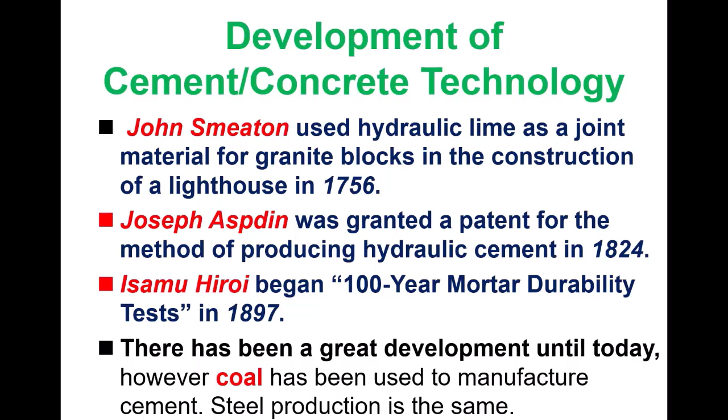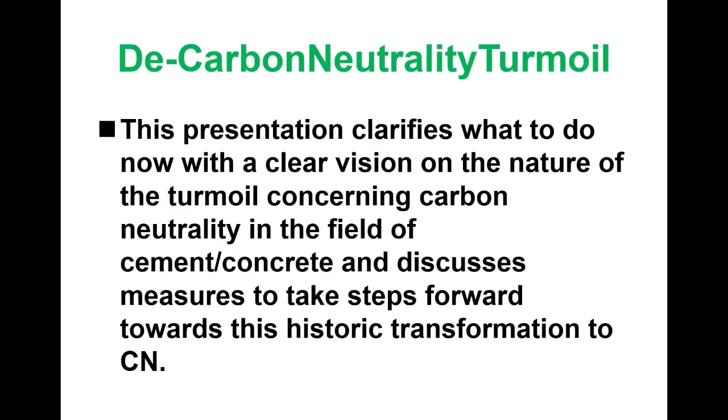So what is the decarbon neutrality turmoil? I would like to clarify what to do now with a clear vision on the nature of neutrality in the field of cement and concrete, and then discuss measures to take steps forward toward this historic transformation. I would say historic transformation to carbon neutral. So this is not so easy.

But we need to know what concrete is to understand the essence of concrete. Concrete is a quite simple material that combines aggregate, which accounts for about 70% of its volume. This is very important. Not so much we can do because of that. And with the cement hydrates, just aggregate, cement hydrate and water. Aggregate is the most abundant material on the earth. And water is the same, which is necessary for hydration of cement.

And we are using limestone as a raw material of the cement. It's a substance that has been produced by living organisms over a long time. Therefore, we can say that concrete has the characteristics of a material that we can use in large quantity. This is the nature of concrete. So when we consider carbon dioxide and carbon neutral, we need to pay attention to the essence of concrete.

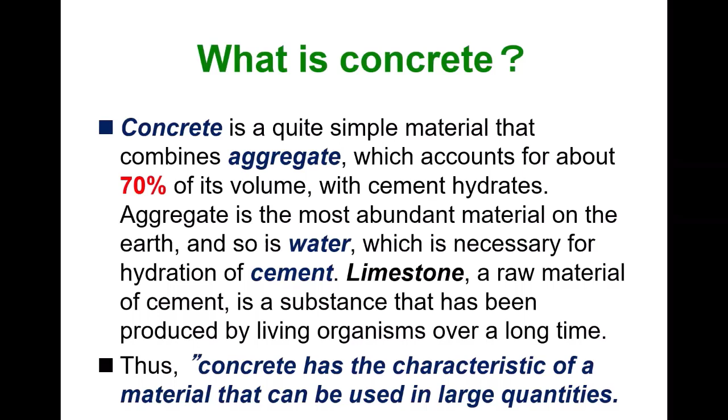And then we have discussed global warming and carbon neutrality. I would say that modern society has been created by use of fossil fuels. It is causing global warming, as you know. So because of that, we human beings have decided not to use fossil fuels, to realize carbon neutrality in the future. In the future, this is very important, because right now there is a limitation to what we can do. And let me talk about sustainability, which is related to carbon neutral.

So the United Nations defined sustainable development. It says that it meets the needs of the present without compromising the ability of future generations to meet their own needs. You can see that book, Our Common Future. It was defined in 1987. So from this definition, we realize that the goals of economic and social development must be defined in terms of sustainability.

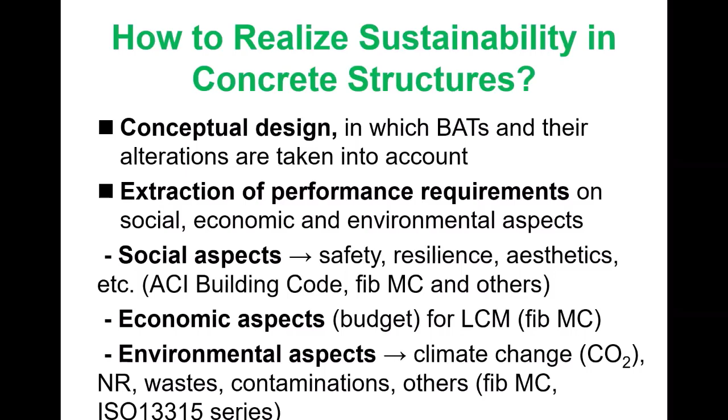And the environmental aspect: this is climate change, CO2, natural resources, waste, and contamination. The fib Model Code includes this aspect. And also the ISO standard 13315 series, which I founded in ISO, and we have developed this standard. So by using this standard, you can evaluate and calculate the environmental impact, how much carbon dioxide you emit. So this is one procedure.

What is the carbon neutrality turmoil? As the Dean mentioned, the Paris Agreement was adopted in 2015, which is a global plan to keep temperature increases well below 2 degrees Celsius above pre-industrial levels, but pursue efforts toward 1.5 degrees Celsius. And you know that at COP28, which was held last November and December, they decided to transition away from fossil fuels. So this is a very important next step which we have to aim for.

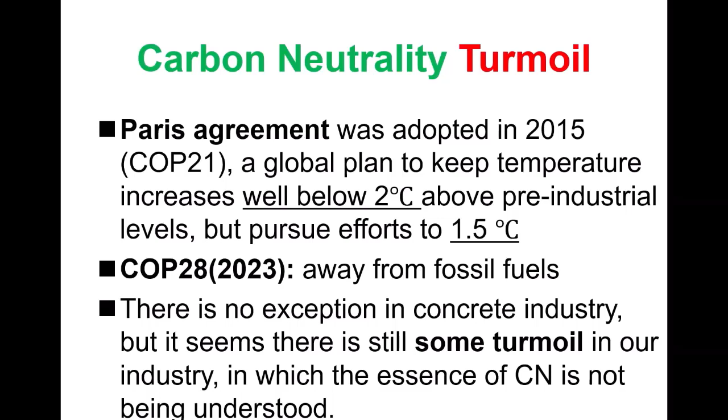There is no exception in the concrete industry, but it seems there is still some turmoil in our industry in which the essence of carbon neutrality is not being understood. The main part of the turmoil is fossil fuels. So we need to quit the utilization of fossil fuel. This is one of the most important points: from fossil fuels to renewable energy.

And we set the target by 2030. One is tripling renewable energy capacity, and another one is doubling energy efficiency. So this is COP28. If you look at renewable energy capacity, the top 10 countries according to IRENA are China, the United States, Brazil, Canada, India, Germany, Russia, Japan, Norway, Spain. But we need to consider the population. China looks very high potential in renewable energy, but they have a lot of people. So this is the current situation.

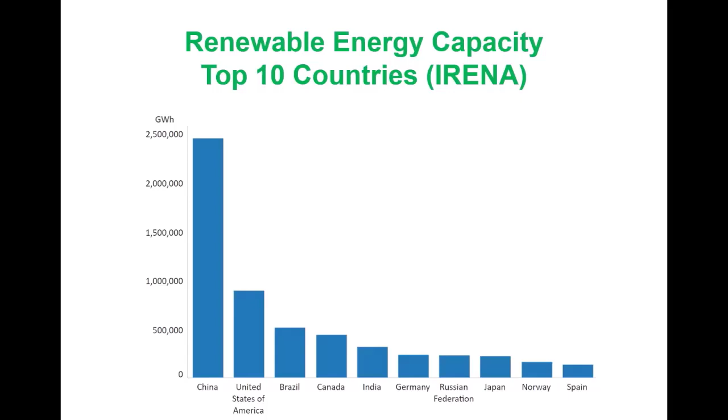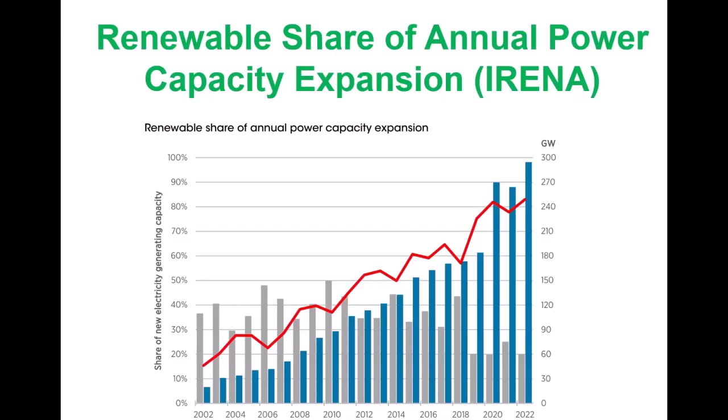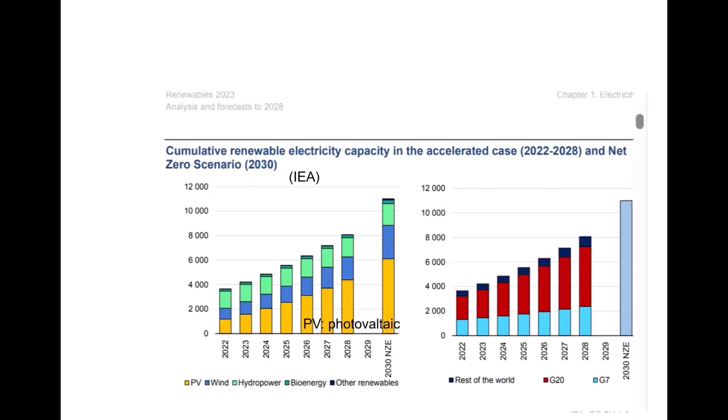And outside that, what is the essence of carbon neutrality in cement and concrete? As you know, cement production inevitably generates a large amount of CO2 from its raw materials and fuel. This is the fact. And therefore, in order to get carbon neutral, the direction is reduction of clinker, use of supplementary cementitious materials, and change of cement manufacturing by using new fuels like hydrogen. If you want to use hydrogen, right now the cost is quite high, but in the future I think it will decrease.

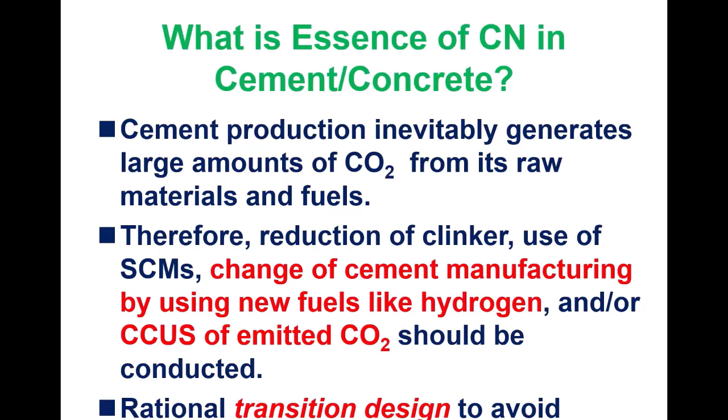And then, carbon capture, utilization and storage of emitted CO2, because we are emitting inevitable CO2. So there are several directions which we have to see. So how to do that? We need a rational transition design to avoid carbon neutral turmoil. This is very important, transition design, how to do that.

Outside that, there are many tools for transition design. Fuels, hydrogen fuel is one, and also you may use blast furnace slag, fly ash, as my previous speaker mentioned. But we have to be careful: the possible replacement of blast furnace slag and fly ash into cement is just 7.3% and 0.27%. It's not so much available. So this is also important.

Even if you want to utilize the blast furnace slag a lot, there is a limitation of availability. And then carbon capture storage, you may be able to utilize that, like methanation. So this is CO2 plus hydrogen, which will produce methane. So if we can do that, there is no limitation. So this is a future important tool. And then I'll talk about the trees and oceans.

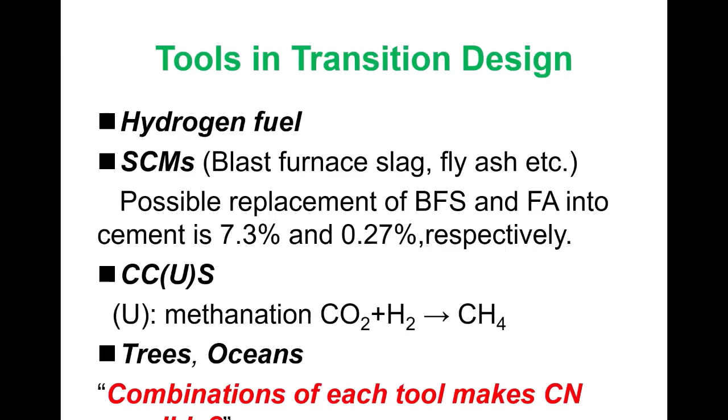Because those tools are not enough to achieve carbon neutrality. I would say that the combination of each tool makes carbon neutral possible. Well, I would like to show numerical calculations of how to reduce CO2 from cement production by using each tool.

As you know, the amount of carbon dioxide emission from cement, according to our calculation, is 3.47 billion tons in the world. And how about the possible carbon dioxide reduction? If you utilize hydrogen, quite a good tool, we can reduce 1.37. But unfortunately, SCMs are not so much, as shown here. And how about carbon capture storage? There are limitations to utilize this technology because we have just a 9.3% share, because other industries also may use it. So there is a limitation even in our industry.

So this is the amount of CO2 which may be reduced. And then methane is a different story; some city gas companies are trying to do this in the future in Japan. And you can calculate the remaining CO2 from the emission minus the possible reduction. So it becomes 1.33 billion tons. It is just only 3.4% of the total CO2 emission, including other countries' emissions.

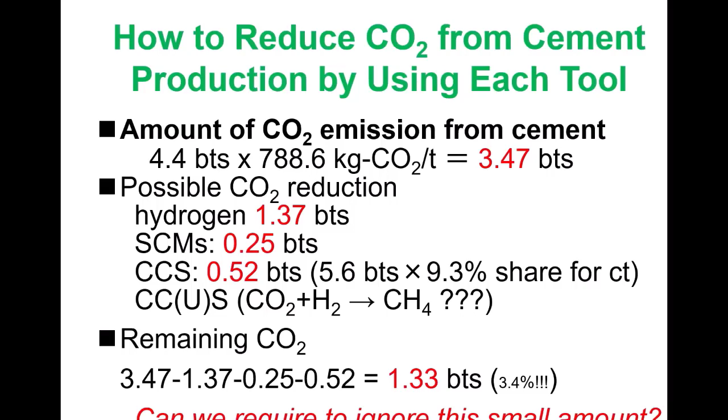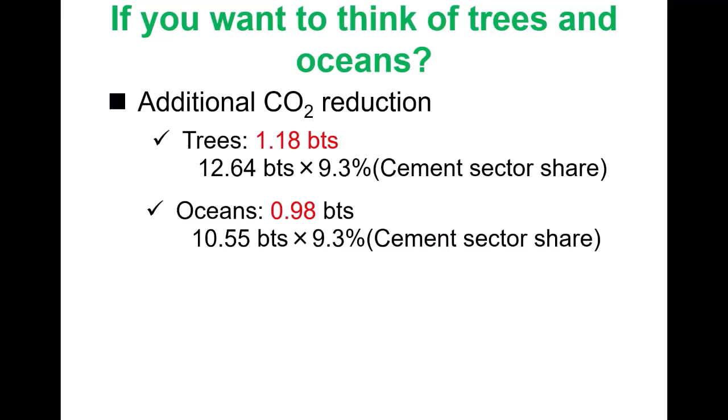So from this fact, I would say, can we require society to ignore this small amount? So we don't have too much. But if you think of the trees and oceans, this is also not unlimited. There is a limitation because other industries also may want to use them. So if you consider trees, this is the CO2 absorbing capacity of trees. Multiply by 9.3%, the cement sector share. And how about oceans? This is the potential. And then for the cement sector, we may be able to use this amount by using oceans.

So this is the summary of this calculation: the emission is 3.47 of CO2, and the reduction is hydrogen fuel, supplementary cementitious materials, and CCS. The total, including trees and oceans, is this amount, a total of 4.3 billion tons. Amazing, this is carbon neutral, even carbon negative, if you consider the CO2 emission. So this is one calculation which I did.

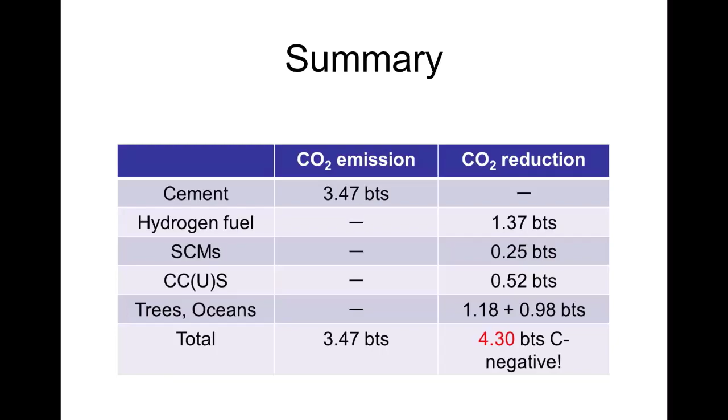So you may have other tools in the future. Like that, you can calculate how much we can reduce the CO2. But it seems to me there are not many tools in our industries. That's okay. Time is coming.

And let me touch on the wildfires. This is the negative cascading of global warming. In Canada, quite recently, there were wildfires. Someone calculated they emitted 1.7 billion tons. So huge. And right now in the US, you have the Texas fire, right? If it is the same, a tremendous amount of CO2 is emitted by wildfires. And these are the emissions of Canada, USA, and Japan: 0.52, the US is large at 4.8, and Japan is 1 billion tons.

So if you look at this amount, how do we have to consider this fact? And 2019 fossil fuels, in the IPCC report, just 38 billion tons. And cement manufacturing is 3.47, right? This is the total. And cement, this one. If you utilize hydrogen, it becomes 2.08. So look at that, the total amount of the CO2 emission. Not so much.

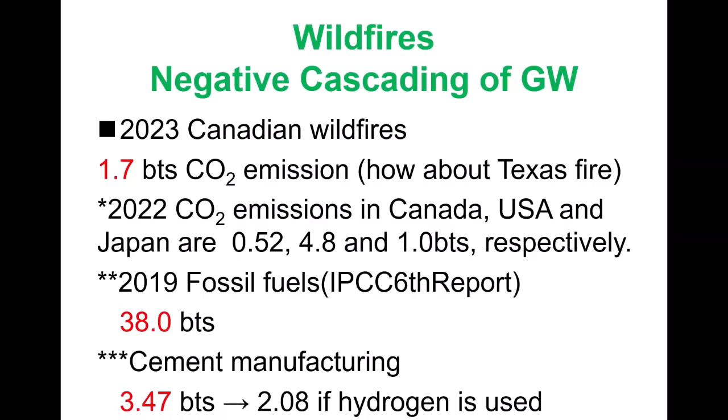And you have the EPA Energy Star certificate. I found recently from the newspaper, according to the newspaper, it says that 11 cement manufacturers received the certificate. 11 cement manufacturers from EPA as a prestigious recognition for being in the top 25% of energy efficiency.

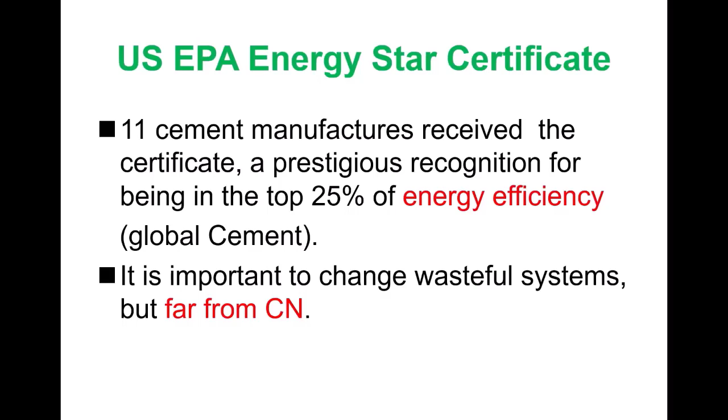So it is important to change, of course, wasteful systems, so you may be able to have this Energy Star certificate from EPA. But it is quite far from carbon neutral, right? So this is one factor. And this may be the last slide.

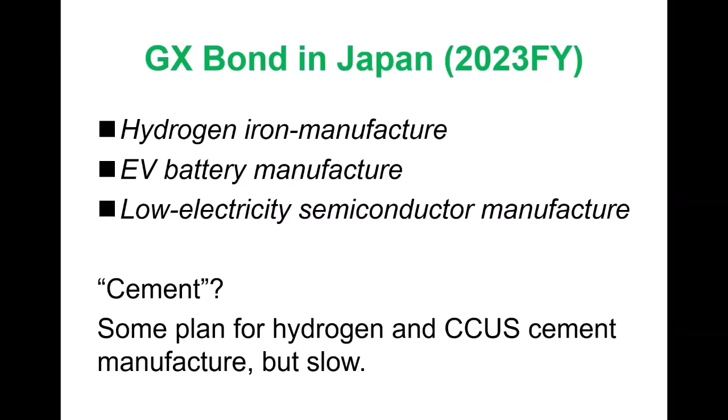The GX bond in Japan, 2023 fiscal year. So our government is going to spend on hydrogen iron manufacture and EV battery manufacture and low electricity semiconductor manufacture. How about cement? We have some plans in Japan to use hydrogen and carbon capture and utilization. But very slow. But I think that direction is quite clear. So they started to consider these things.

Concluding remarks. I would say that cement concrete technology accumulated over hundreds of years cannot be transformed overnight. We need time. And low cost has been the basis for conventional technological development. But carbon neutrality demands a drastic change in the existing technological foundation. So there is a need to make drastic change to the framework of sustainability concerning society, environment, and cost.

We have a lot of codes, but those codes have been developed based on older technology. If you want to introduce a new technology, it doesn't work. This is what I would like to emphasize. From that point of view, I would say forget the illusion of innovation.

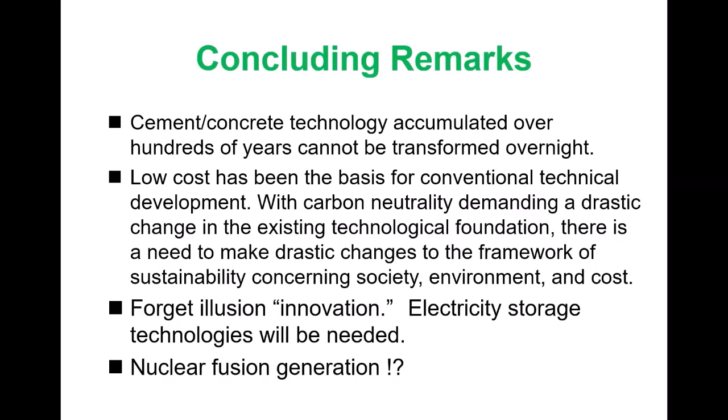So I would like to propose one thing: there is a limitation as long as we use the existing technology. So we should encourage cement manufacturers to change the production method to utilize our traditional wonderful cement. This is very important. We have a tremendous amount of data. So we don't want to change.

So this is for a sustainable human society in which de-fossil fuel is used and emitted carbon is captured and utilized. Steel is the same, but in the field of steel, there is a trend from the blast furnace to the electric furnace, which means that the amount of blast furnace slag will decrease in the future. So we cannot use much. If we can have a cement like that, then the concrete industry can concentrate on concrete technology.

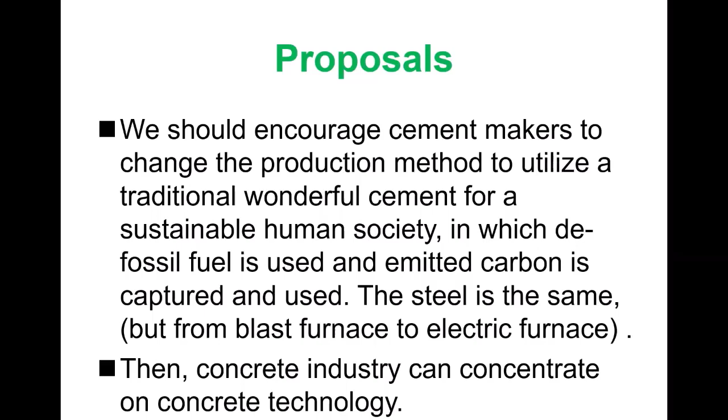So this is what I want to emphasize. What is the essence of our history and solution? Our ancestors regarded the Earth as alive. However, what modern humans have conducted is its exploitation, its enclosure, and its propertization. I call it EEP. Because of that, we are facing global warming and carbon neutral realization. The solution is very simple: to quit EEP.

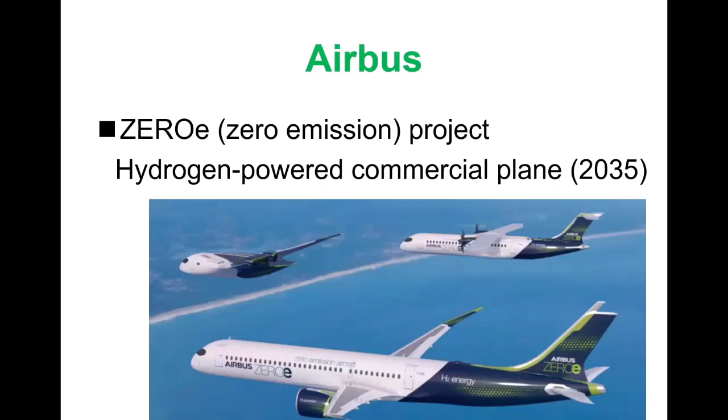And you may know that Airbus has the zero emission project. Probably by 2035, they have a plan to sell a hydrogen-powered commercial plane. So we can also do it in the concrete industry. Even plane companies are trying to find a new direction. So this is my presentation.